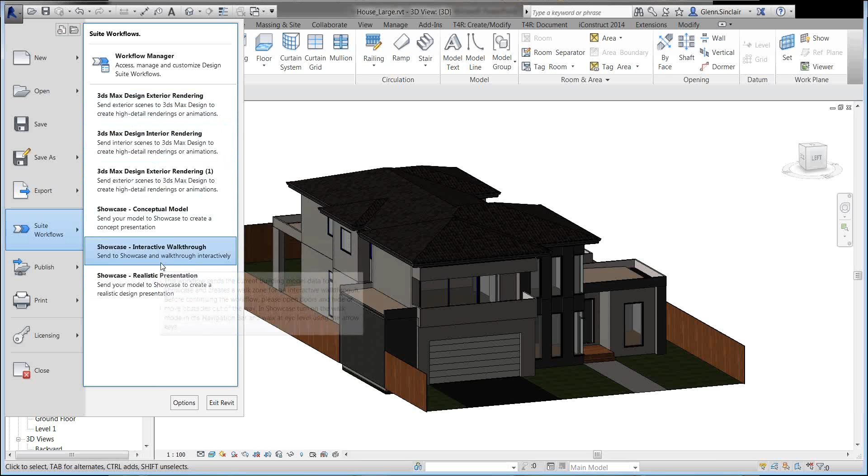So there's a few different settings that you can set up, these are the presets for different things. We're going to click that, we're going to send it to Showcase for an interactive walkthrough. I'm going to just leave the default settings there and let it go. I'm going to put my little environment down at below the floor level. And so that one click opens up Showcase in the background and transports the Revit model over into Showcase with all of its materials.

As you can see there, my computer's complaining a little, but that's now opening Showcase for me.

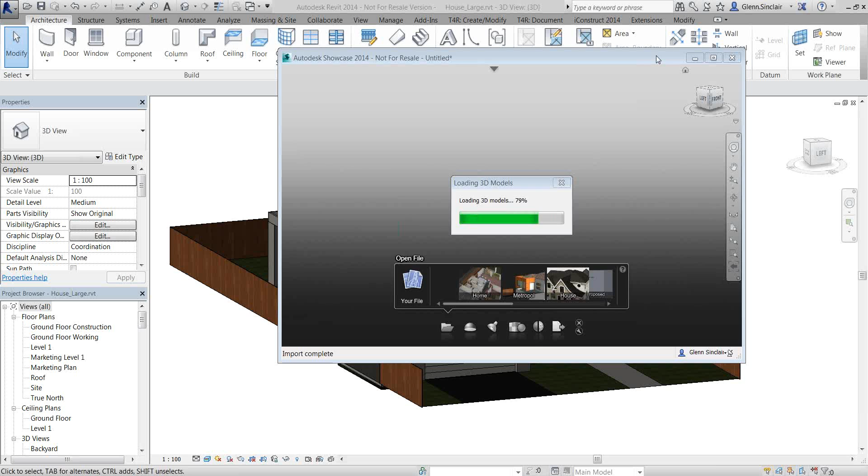Here we go. So Showcase is a tool that works with more of a real-time rendered environment. It's using the graphics card for rendering rather than the computer CPU, so you're getting a much faster render time, and we can do some real-time exploration of the model at a higher quality level than what's available in Revit. As you may know, once a Revit model does start to get large, it can be quite cumbersome to orbit around that Revit model. So this is going to solve some of those problems.

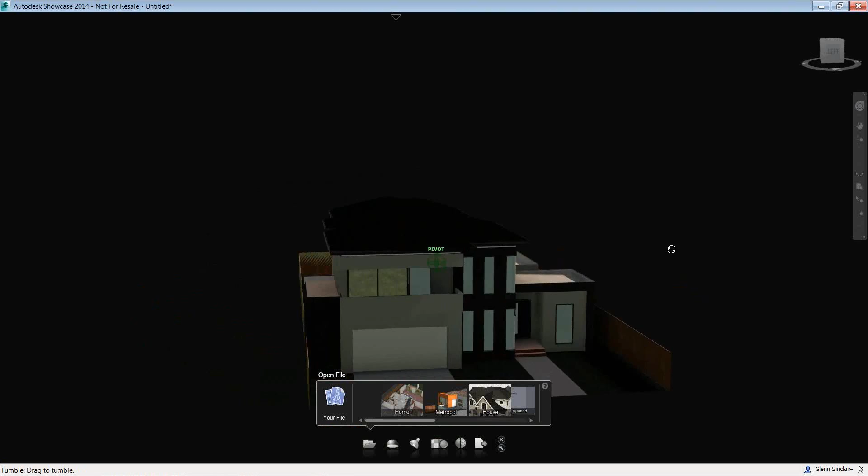So as you can see, it's brought my house through. In typical live demo fashion, the background has disappeared on me. I'm going to just try and put that back in. Usually I would be seeing this with a background of the grass field there, but it seems to be playing up.

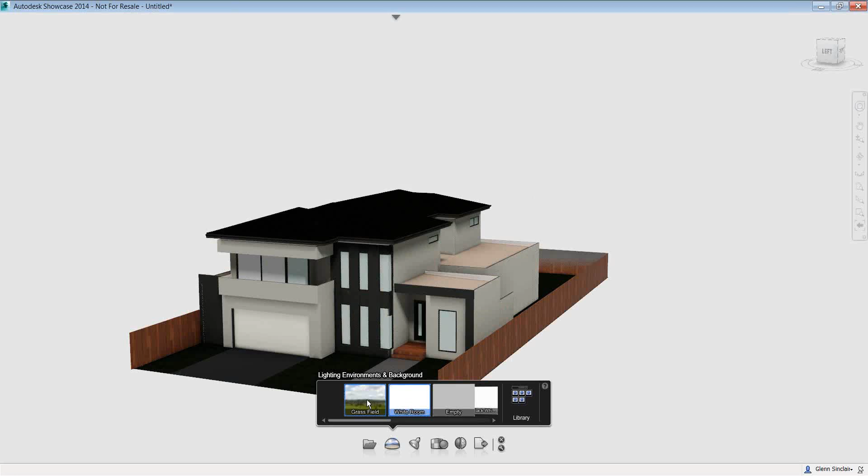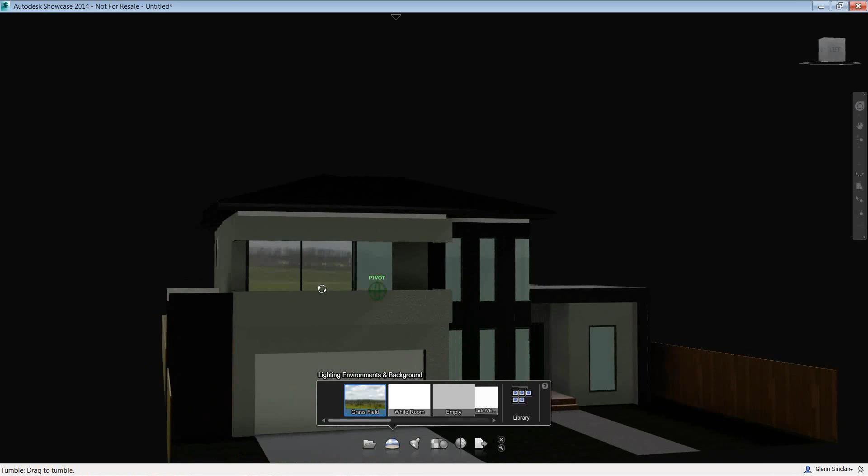That's a new one. Let's put it over to white, back to grass field. I would imagine that's something to do with the webinar recording. This usually looks quite nice with a dome background simulating the environment, but I'm not sure there's much I can do about fixing that. As you can see in the reflection of the window, that background should be displaying everywhere, but I haven't actually tested this whilst recording a webinar, so I'd imagine that's what we're experiencing.

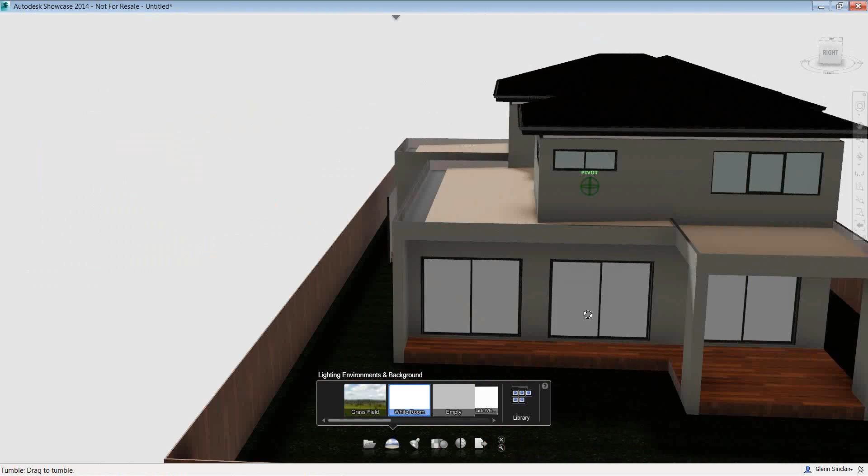So this was my one click, and it's brought it through with all of the materials here. I'm just going to put that back to white so you can sort of see what we're looking at, with the materials through from Revit and any custom materials.

Now I'm going to quickly open up one I prepared earlier, which is the same project that's been brought through from Revit with the Suite workflow, and I've just done a few modifications and a few things inside of Showcase.

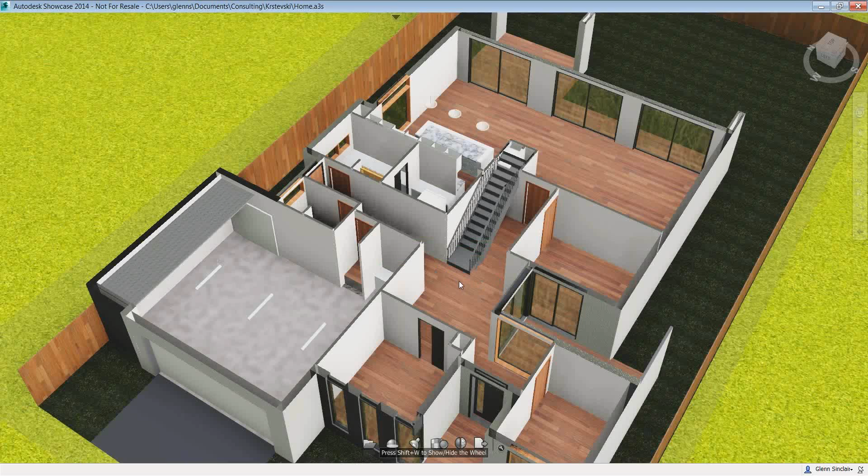So a couple of things we can use to present a 3D model inside of Showcase are options. Options work by having three different types. There are material options—if I come up here to the options tab. Sorry, what do I have to do? Alternatives, sorry.

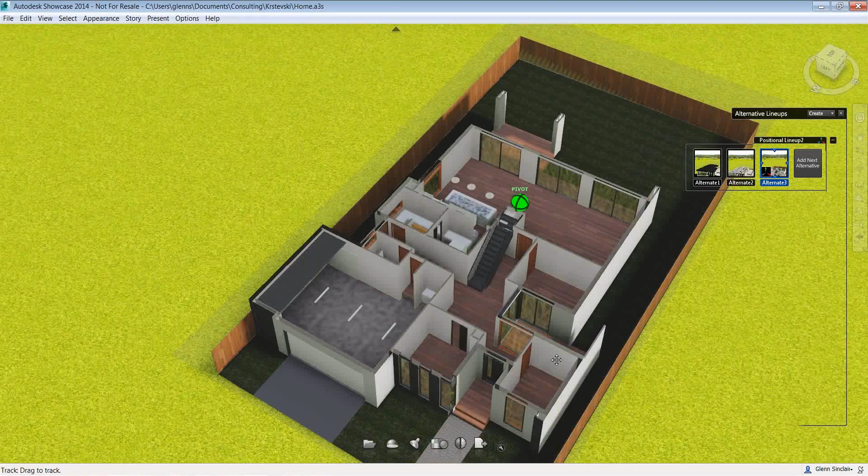So I've got here the alternatives. The first is a positional alternative. In this case, it's the position of the section line cutting through the building. Alternative 1 is to have that section line up top, alternative 2 is to have it halfway through the top floor, and alternative 3 is cutting through the ground floor.

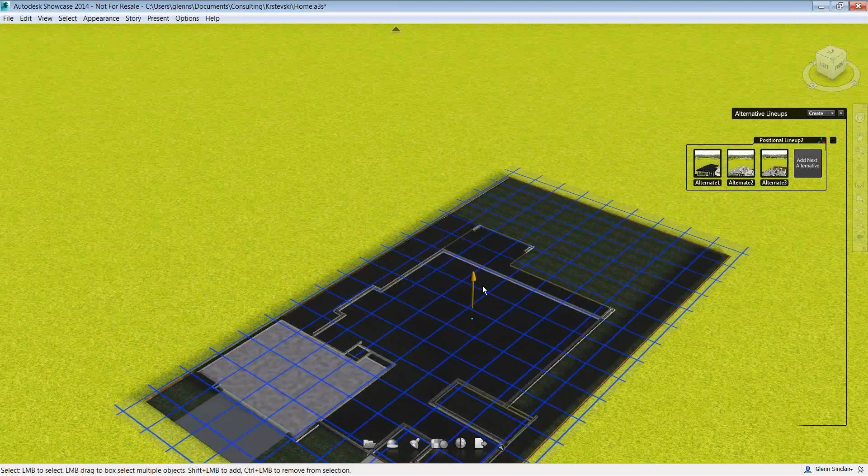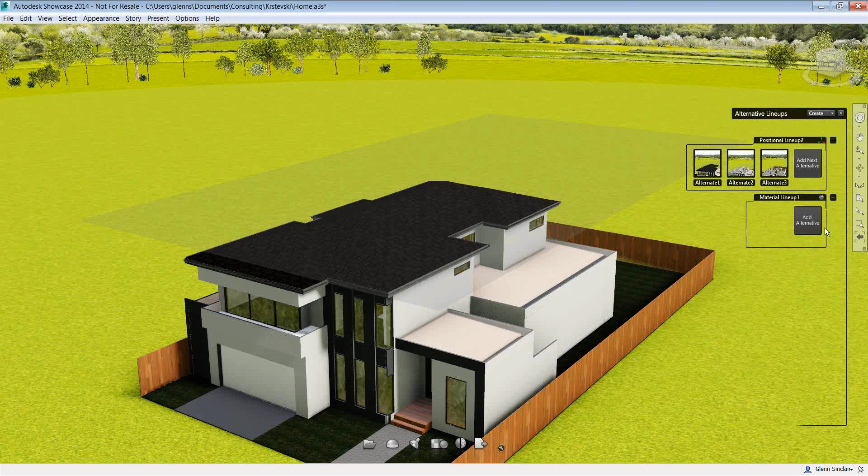So I can manually move that around at any time—do a bit of a Grand Designs thing going on, the house comes up—but I can preset the positions of that section marker here over in the alternatives. The other types are visibility alternatives, where things can be visible and non-visible, and lastly a material alternative.

A material alternative—I'll just show you quickly how easy it is to add one. It would be for a different color scheme on this house. So I may add an alternative: I select an object, and if I select all objects with that same material, I can be looking at the black stucco finish there. I can add that selection to an alternative.

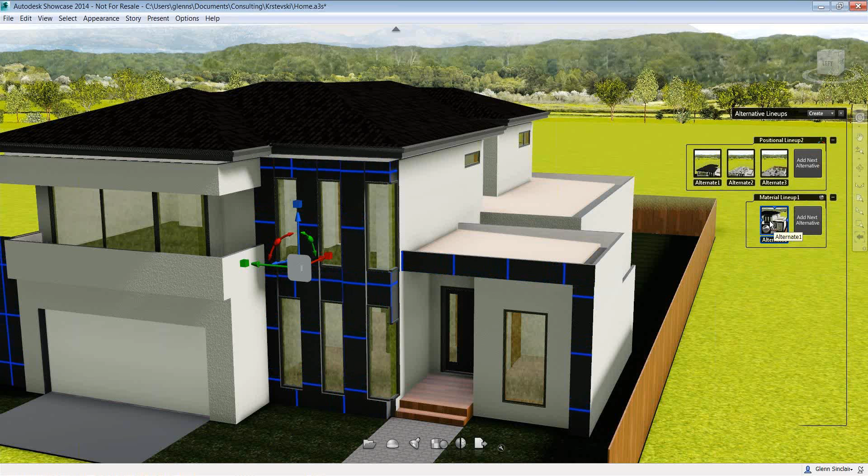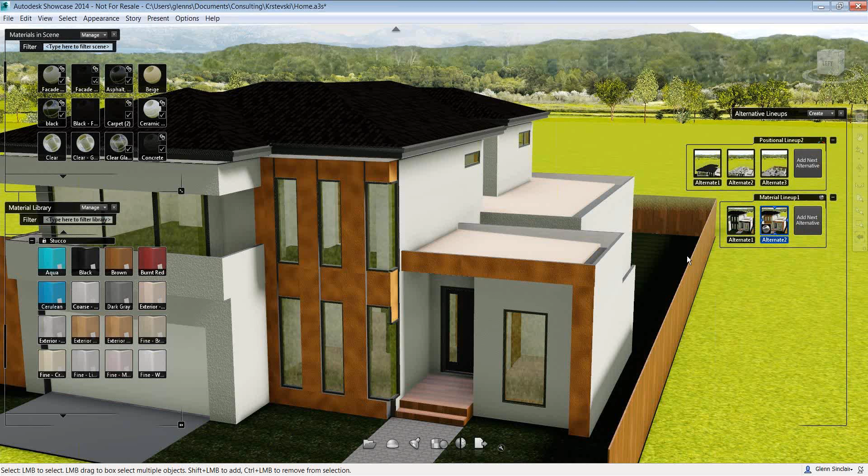Then I can easily change that material. I'll come up into materials—it's got a bunch of built-in materials here. I'm going to go to the Autodesk ones and get a different finish, so we're going to go with a brown color there, and say add next alternative. So just like that, I've got an alternative I can present to a client, where alternative 1 is the black finish and alternative 2 is the brown, and I can go around changing materials and positions on a number of objects, but that's just the basic aspect there.

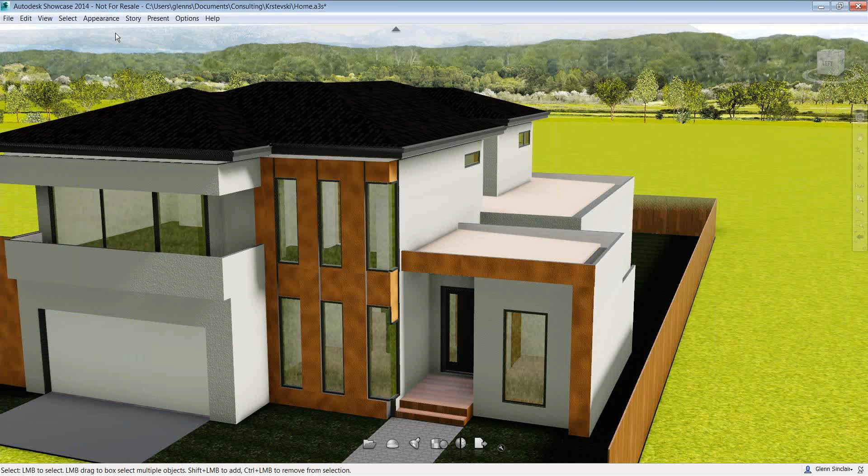So those alternatives can be displayed in what's called a storyboard. What you would generally do is go around and take a number of camera shots—so I've moved the camera into different positions and saved those as shots. Shot 1 being the beginning, click shot 2, I've set it to transition from shot 1 to shot 2, sort of like SketchUp in the way it's presented there.

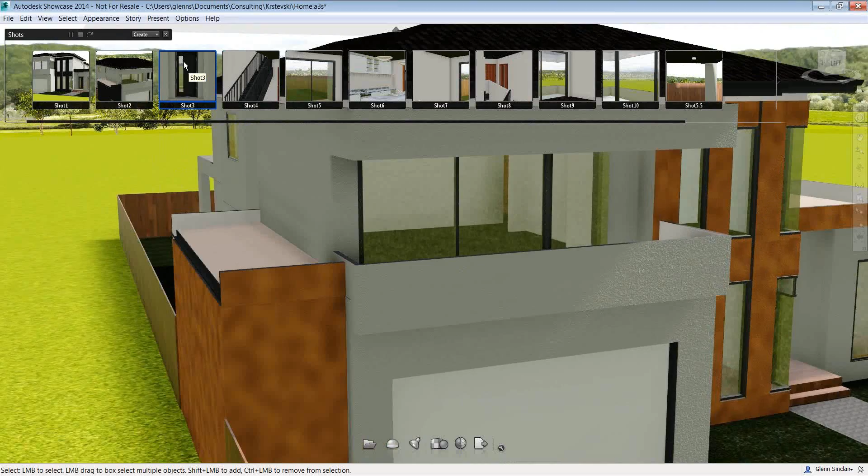So those shots can be added to a storyboard. If I come up here to storyboard, this is a number of shots that have had the alternatives set on them—so we could have it zooming to the camera and changing the material to whatever it is. If I hit play, it's going to show the certain shot for a number of seconds and then move to the next.

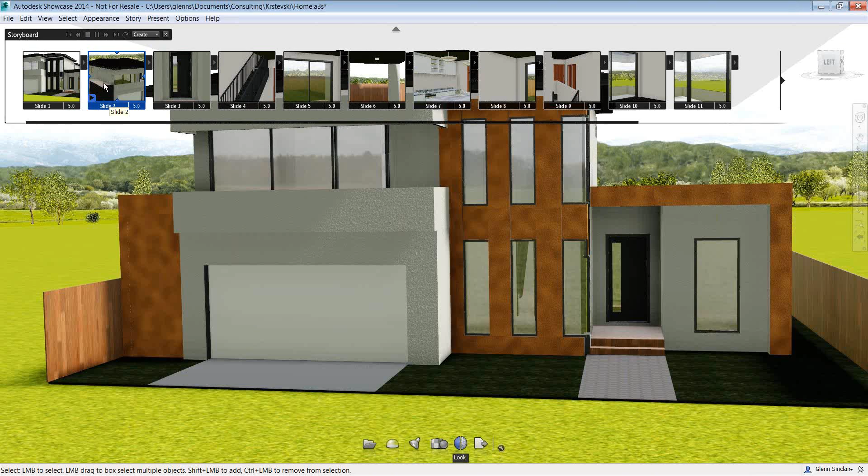And then the last two shots simply have the alternative of the section box added to them—so a camera shot with the material alternative and the section box in there.

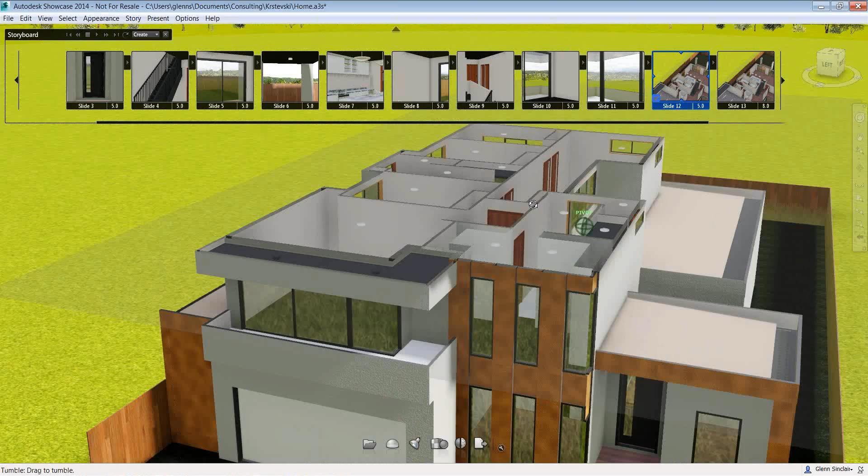Stop that. So this is all very nice to show if you have the client in the office sitting in front of you at your computer that has Showcase installed. But another great thing about the tool is that it can be exported out of Showcase in a number of formats—so I can save this storyboard set as an AVI, exporting it out as a movie file.

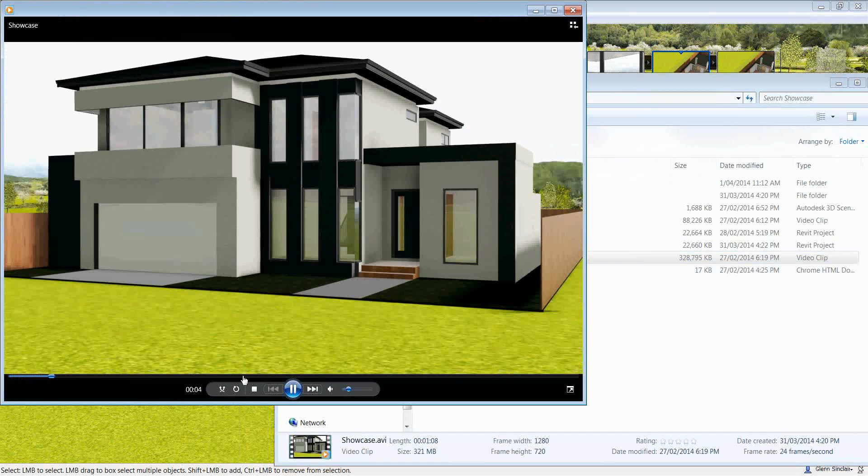So you see that comes in at about 330 megabytes, and then you send this off to the client. They don't have to have Showcase installed, they don't have to have any special software - they can just sit there and watch the movie.

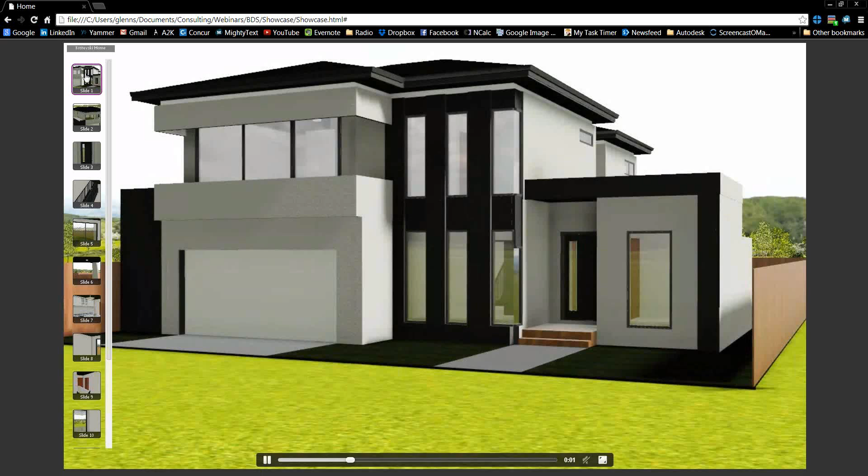The other format you can export out of Showcase is an HTML file. That creates a website you could email to the client, giving them the option to click on each slide. As they click, it transitions from one slide to the other, so there's a bit more control there. If I just click straight through into my kitchen area, you can see - all right, very nice - upstairs.

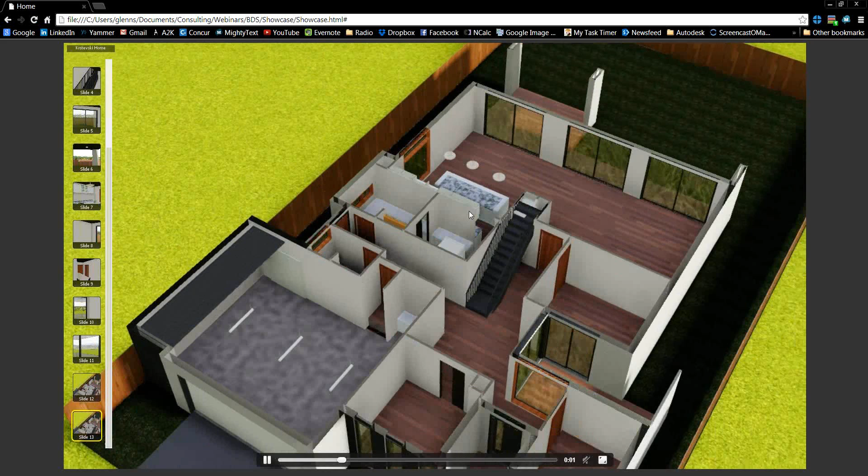And we chop the roof off. So a good little example there of being able to export out of Showcase and give it to clients who aren't running the software.

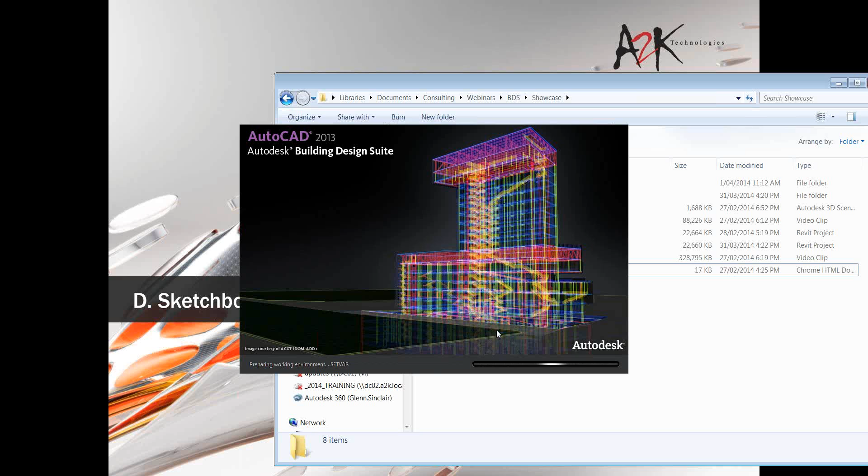If we're using AutoCAD at the moment for design, it can be a little frustrating sometimes not having the flexibility for free-form shapes and whatnot. Let's put this over here. So with the Building Design Suite, Sketchbook Designer comes as a tab inside of AutoCAD - you can access all of the tools here.

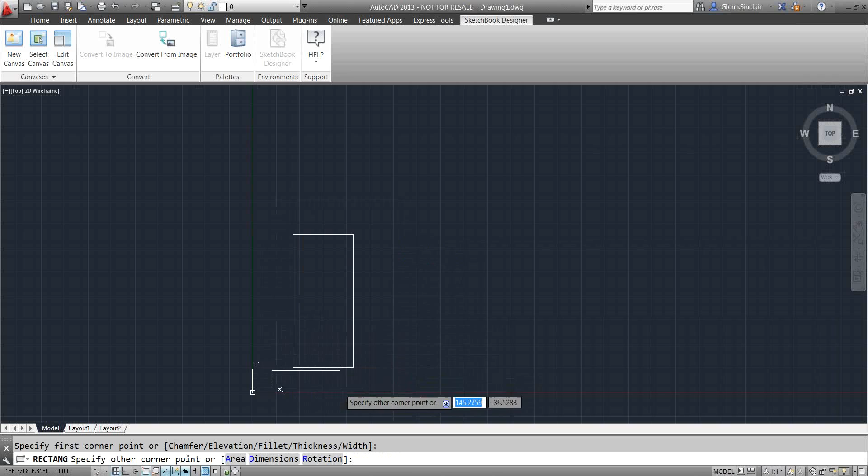So I'm going to ever so crudely model up the beginning of my project, which looks a little something like this. This is an elevation of my office tower, of course.

So the way we need to get started, if we wanted to add a freeform canopy here, is the example I'm going to use. It would be possible to go ahead and try drawing a spline to the shape, but Sketchbook Designer is really the tool to get a more sketchy format where we can start drawing - it works with canvases.

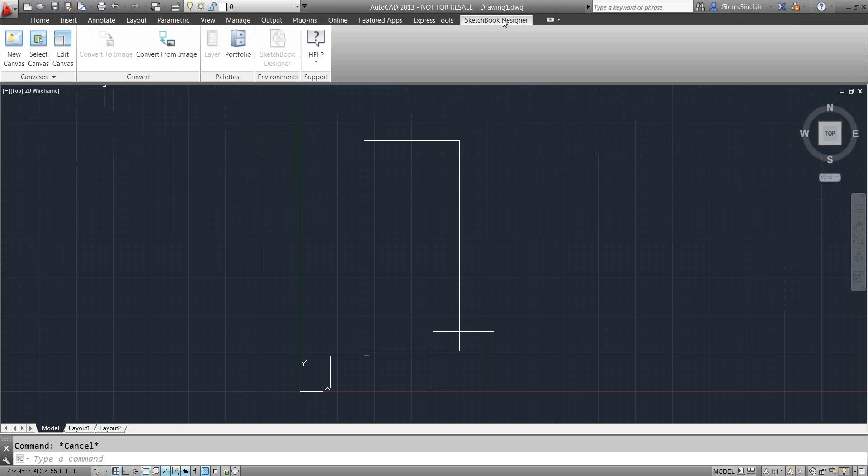So when we look at the Sketchbook Designer tool, we can see we have to create a new canvas, which sets up the size of the paper that's going to open up inside of Sketchbook Designer. Oh, thank you, I haven't activated it - try that. So it's going to come up with the canvas size and let me know what size I'm looking at here, pixels per inch and whatnot.

The width - let's give it a better size that covers my design here. Whoops, that wasn't very good.

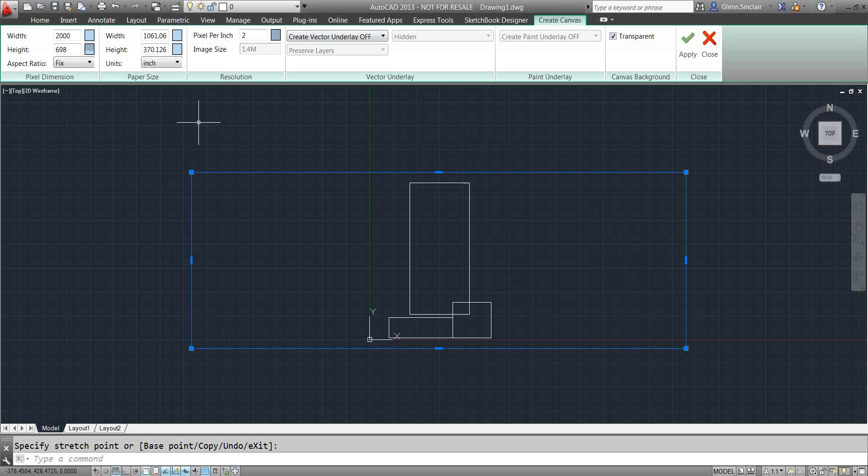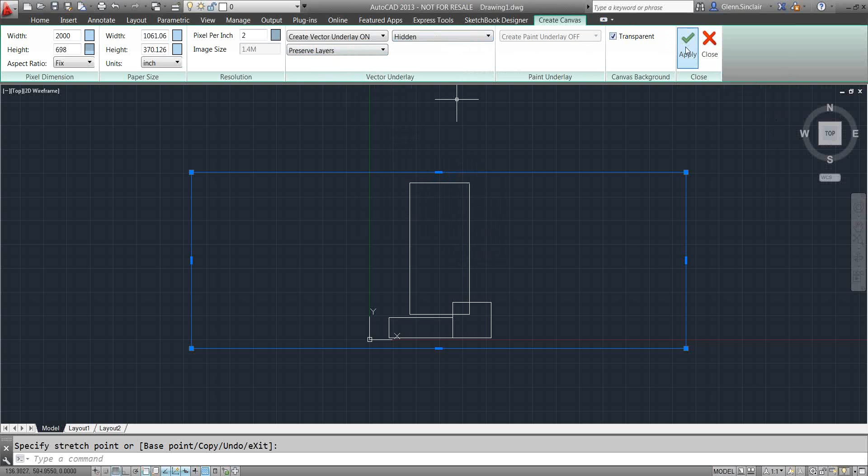So when we create that canvas, you have the option whether the vector lines from AutoCAD come through into the canvas or not. I'm going to say yes - create vector on, which will bring these DWG lines through from AutoCAD into Sketchbook Designer, and I'll let those preserve on the layers they were on if you had a full elevation with layers set up. Then I'll hit apply to create the canvas initially.

So that has turned that into a canvas. Now I have a few tools within AutoCAD, but the bit I'm going to demonstrate here is to actually export out to Sketchbook Designer. So when I click that button, it's going to minimize AutoCAD, and it's AutoCAD in the background.

Looks like it's crashed - it's not responding, it's got this spinning hoop of death, but it is still there. This is normal, it's just that you have frozen out the AutoCAD session to work in Sketchbook Designer instead. The moment we bring this back into AutoCAD, it does become active - you have to trust me.

So here I am in Sketchbook Designer. This is more of a freeform sketching tool. I'm here working with a mouse, which isn't very nice, but if we had a touch interface or a pen setup, we would be looking at something a bit smoother.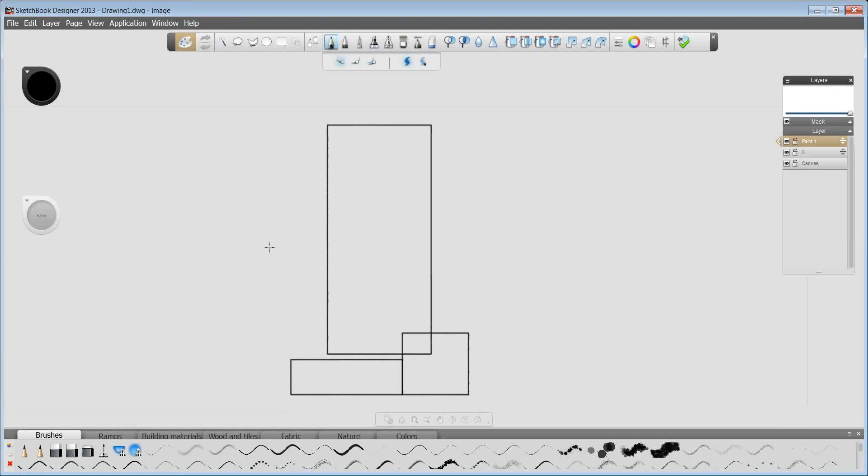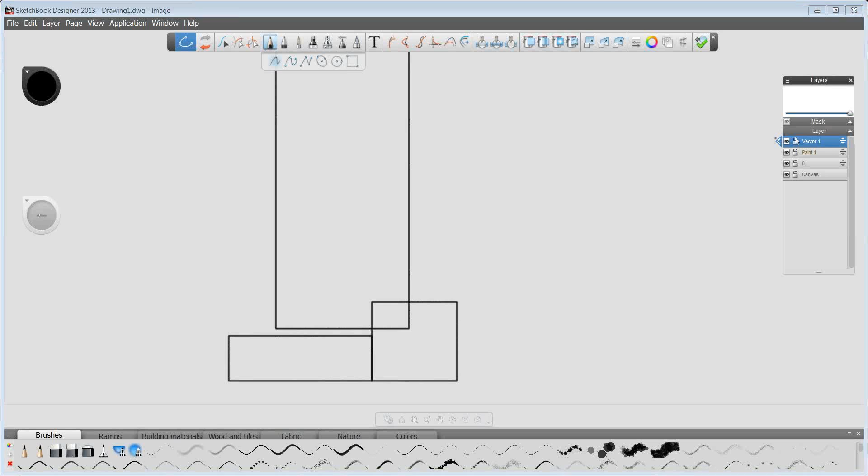In Sketchbook Designer, I can go ahead and start creating my sketching over the top. I will begin by creating a new layer. We've got a couple of main options here: a paint layer and a vector layer. A vector layer is for vectorized lines, so I'm going to bring these lines back into AutoCAD and work with those there. A paint layer creates a raster layer, so that doesn't have the vector information included in the lines.

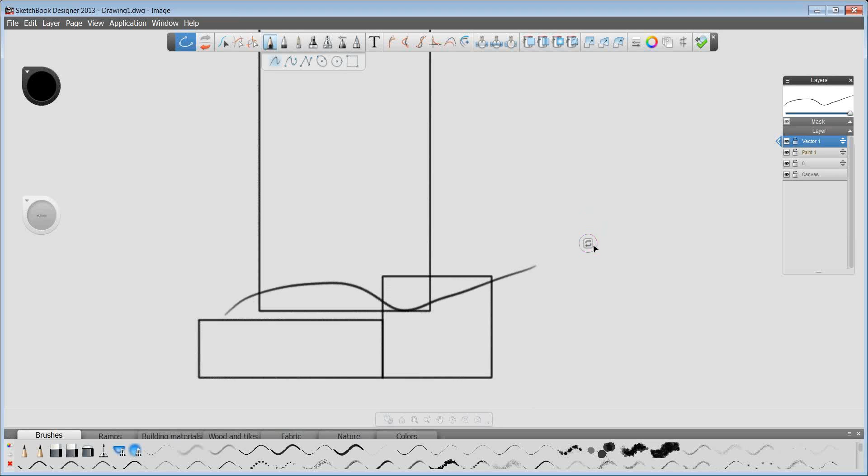So I'm going to begin by sketching. I can do a curve through point, but I'm just going to start by sketching in my beautiful canopy there. With Sketchbook Designer, my line looks a bit rough as I've done it with the mouse, not exactly smooth. After drawing that line, I can come through to the little circle around the tool and adjust the smoothness. If I bring it right out to the outside, it's almost straight. If I bring it right down to how it was, it's almost exactly what I drew. I want somewhere in the middle to create a nice smooth curve, so I'll have that sitting somewhere around there.

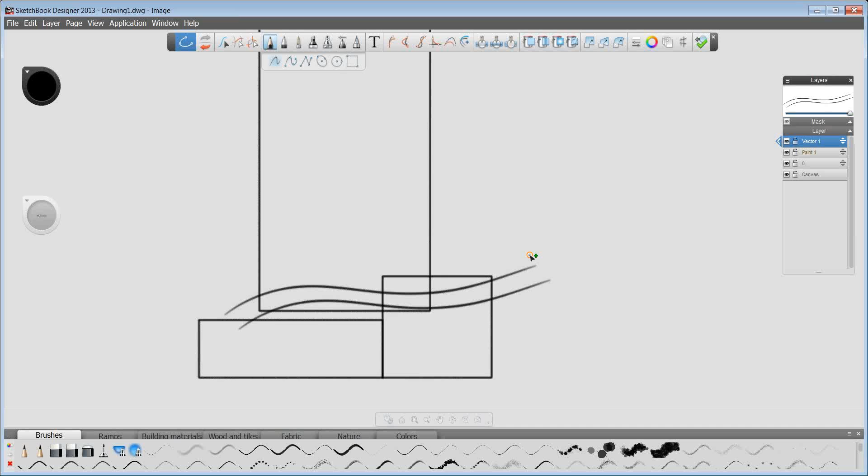So a few common tools in there. I can select these lines and copy, move them around and things like that, all pretty standard tools. I'll go ahead and draw a few extra lines here to finish off my canopy. There's a handy little tool here to select the outside edges only of my curve, so all the bits I don't want, the little end pieces, I can delete those in one go. Yep, that's going to be fine for my canopy.

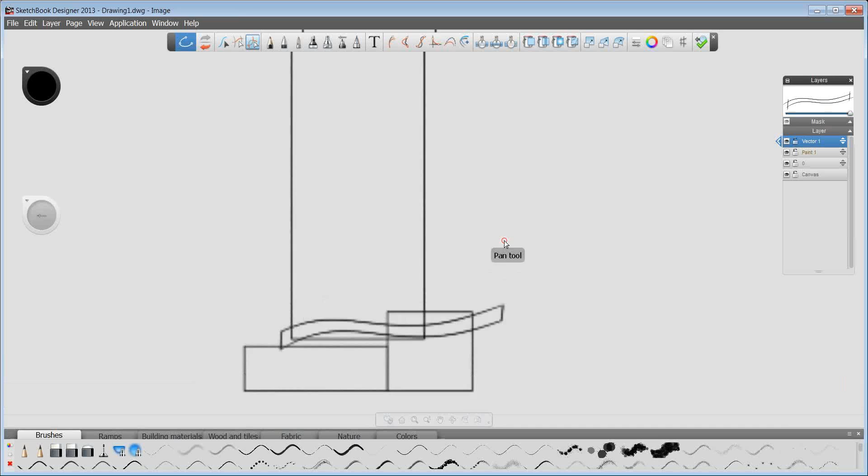So I can then, if I wanted to, create a paint layer also. Hold down left click, I can create a paint layer and embellish this with some trees or what have you, to show the idea of bringing in something in a paint layer and something in a vector layer.

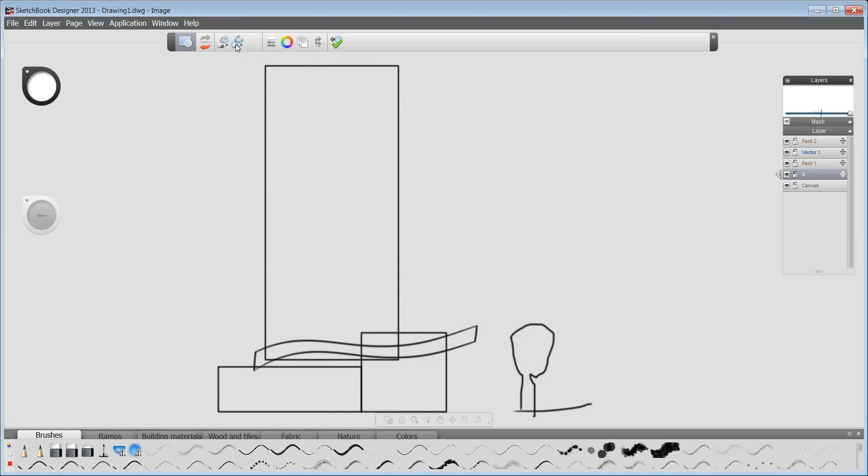The last thing I can do is with my AutoCAD objects here, I can convert so layer 0, which was what came through from AutoCAD, I can convert to a vector layer, and then work with those objects. These are my DWG lines, and I can then change the style of those lines.

So if I wanted something sketchy, well that's an extreme example. Let's say a more sketchy line, or something like a painted line, and I can change the brush radius and whatnot down, somewhere around there.

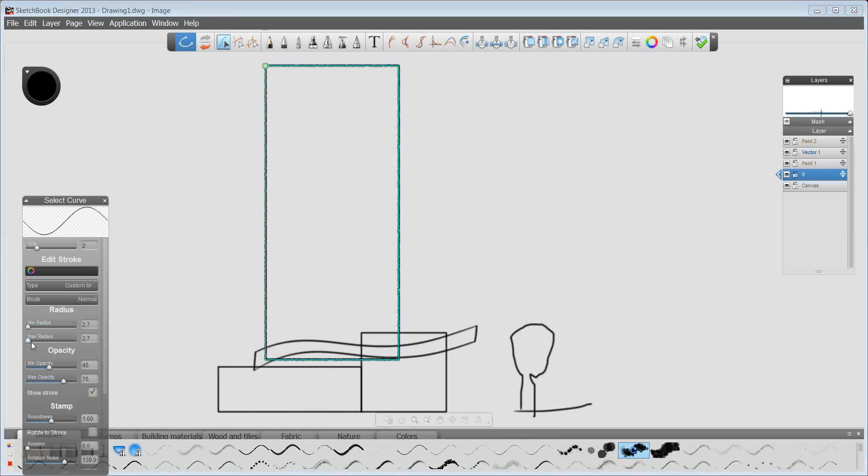So I can change the line styles here that are going to affect the objects back in my AutoCAD session. Okay, so we've got our vector layer, we've got a couple of paint layers, and we've got the other layer there. So now, to bring this information to a DWG format, I can use the export option here and say a DWG. That's going to create an AutoCAD DWG with this information saved into layout space. That can be handy if that's the workflow you're going through.

But for this particular one, I'm going to just hit the button out to the right here, return to AutoCAD. And we do need to click save. If you click discard, it's not going to save any of your changes. I click save here, and we see now that we have this information back inside of AutoCAD.

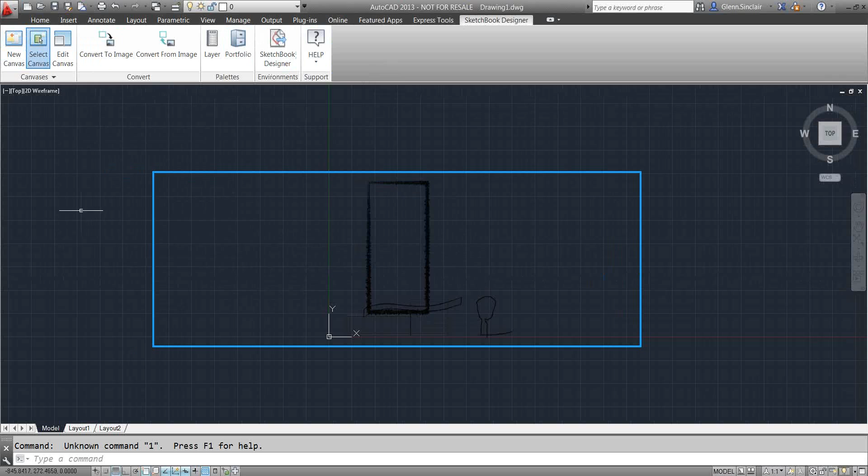That's not real clear there, if I just change my background, and then select canvas. Well, that's a good tip. So when you're working with these canvases, you can't perform any other commands until you've unselected the canvas. So here we go, unselect. That's more like it. So I wanted to change my background color there.

You can see what I'm dealing with. Okay, so I've modified that layer there.

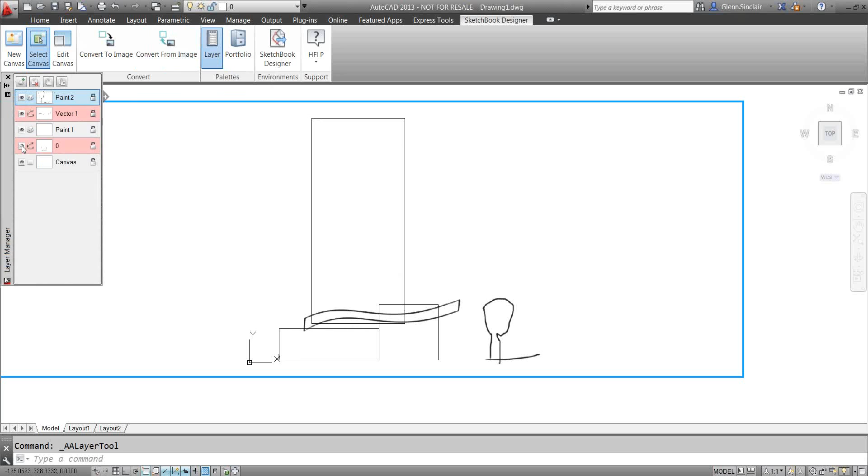So in the Sketchbook Designer area, I can select the canvas. I only have one in my file at this stage. I can see the layers that we had there from Sketchbook Designer, so I can do things like hide the original DWG layer there, the one coming from Sketchbook Designer. You can see the vector layer there and the paint layer also.

So this is, at the moment, suitable for printing. If I needed to print this exactly with my raster objects and my line styles, I could just jump into Layout Space and do a print of this information.

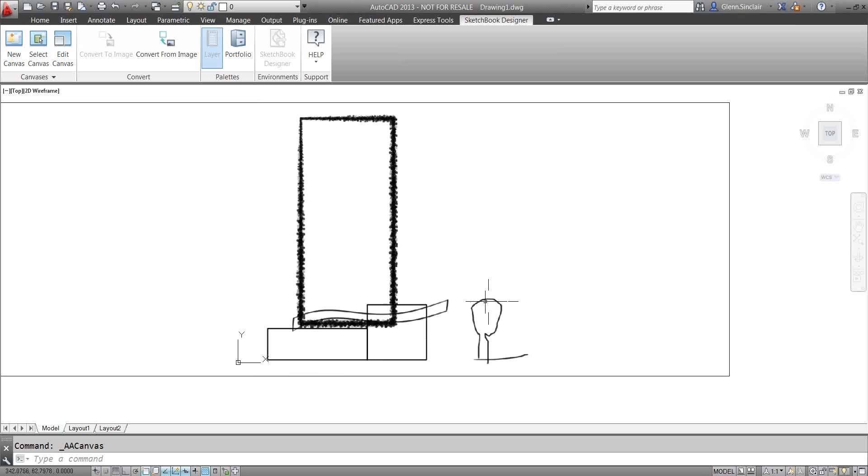If I need to work with it further, if I've got this curve exactly right and I want that to be traced over, we can actually convert that information into DWG lines. So if I select the canvas again on my vector layer, I'll right-click and say replicate vector into an active AutoCAD layer. At the moment I've just got layer 0 active, so I click that, and I get those objects inside of AutoCAD.

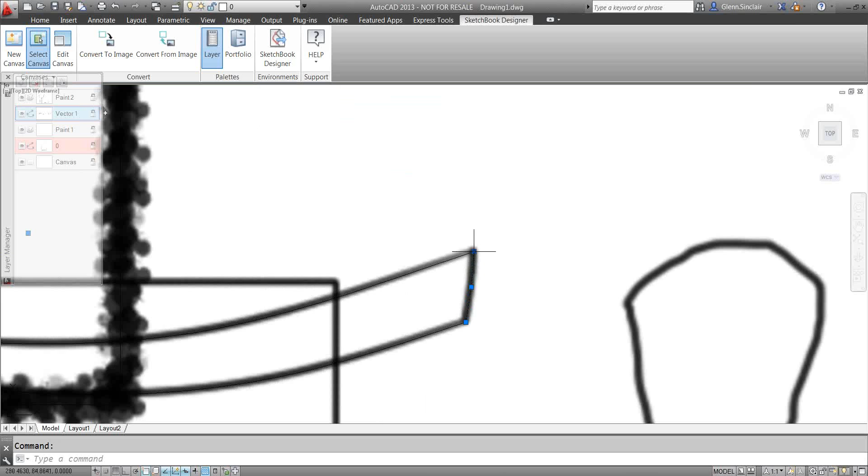So if I just go ahead and hide this canvas, I can see now that my DWG actually contains the lines that I've created inside of Sketchbook. So that can be quite handy. I've still got control over those. It's created them into splines by point, and of course we have the options there.

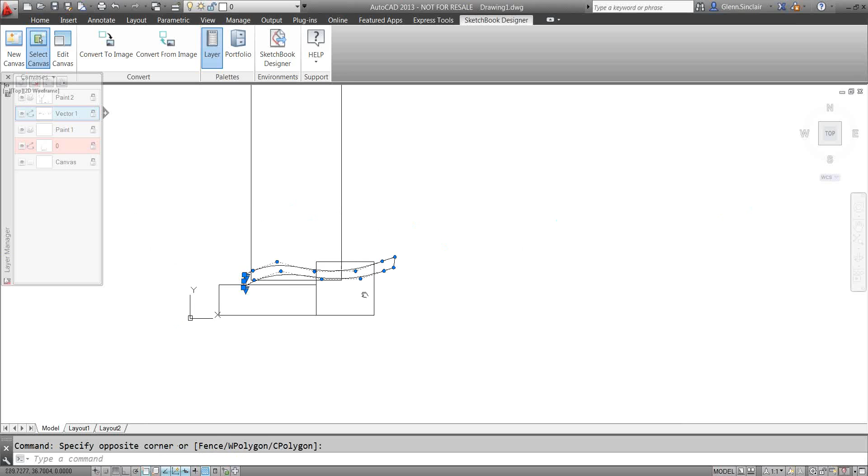So if we've got an exact shape that needs to be done by hand, we can use Sketchbook Designer to do that. Still got my canvas selected, of course. We need to unselect that before we do anything, and we can get those tidied up.

So yeah, we've created a freeform curve in Sketchbook Designer, brought it back through and vectorized it, changed it into a layer inside of AutoCAD.

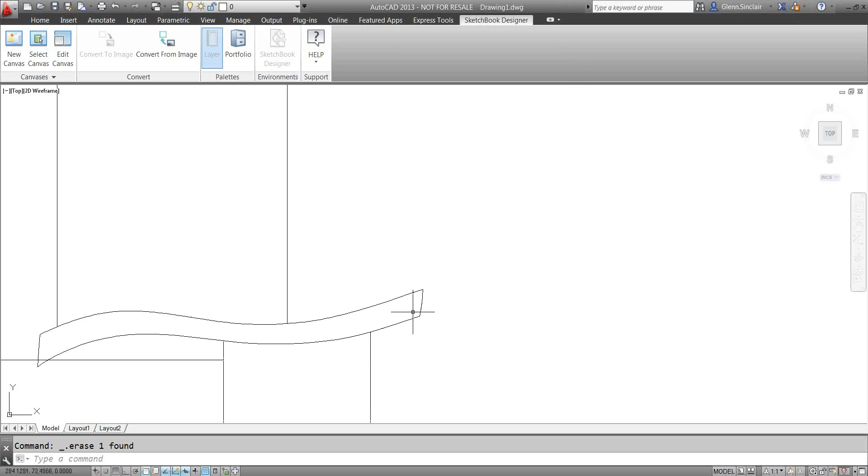Alright, so the next of the little tools that we're going to go through is AutoCAD Raster Design. This is included again in all suites - Standard, Premium and Ultimate - and again appears as a toolbar inside of AutoCAD. So I'm going to whip up my 2014 version, which has that one installed.

AutoCAD Raster Design is software to convert raster to vectors. Raster images are JPEG formatted images and whatnot, where it's a number of pixels side by side. It doesn't contain the information about the line that created those pixels, whereas a vector image contains the start and end point of a line - it's more of a smart line. So the lines that we're dealing with in AutoCAD are vector lines.

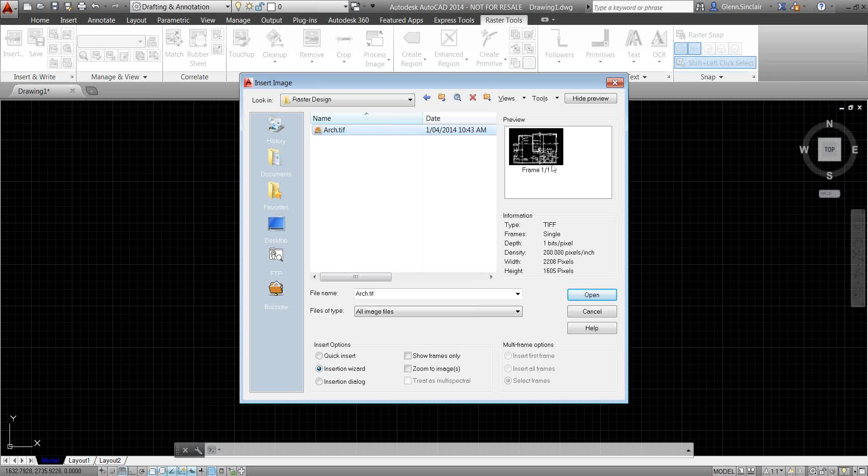I do have one of the example TIFF files that comes with the program, so I'll just show you that in action now. When we use the insert tool, it gives us a number of options. I'm not too worried about the size at this stage. Zoom all - there we see our raster image brought in the background.

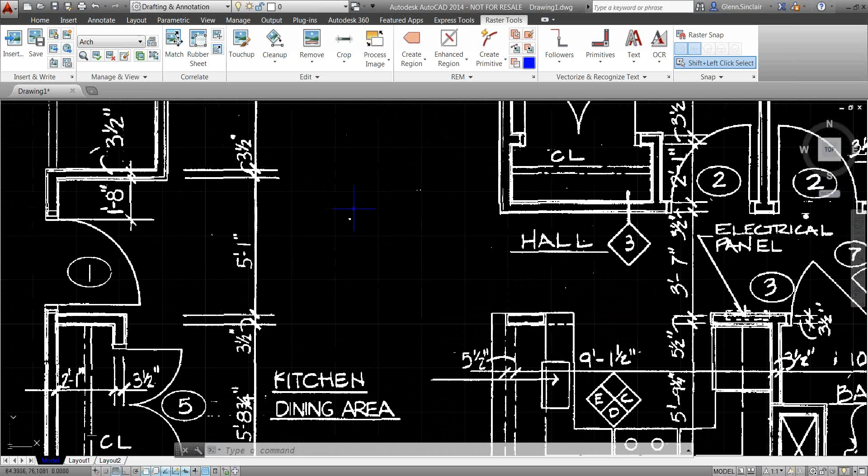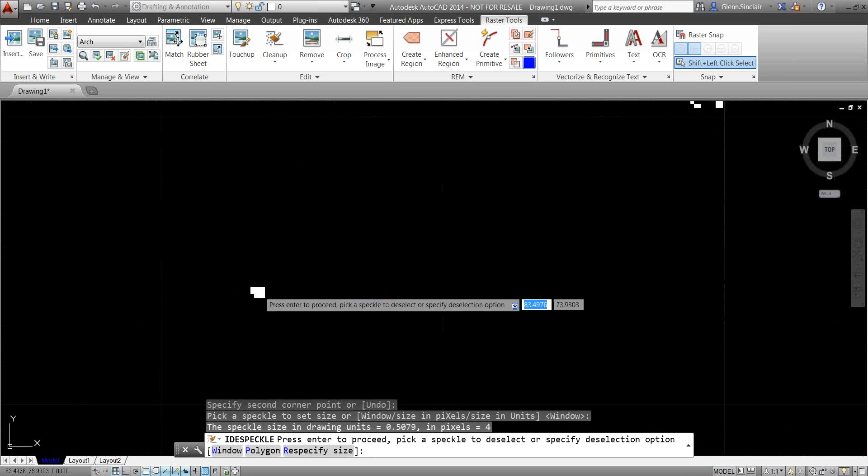So as I mentioned, a few of the tools are the cleanup tool, so the despeckle to get rid of those little dots and bits and pieces that have come into our scan. So if I use that first up, I can say cleanup and despeckle. It's going to ask me which image, so I'm going to say all of that is the area to be despeckled, and then it's going to say pick a speckle to set size. So I could type in the size of the speckle I want to get rid of. I'm going to click that and hit enter, and it's tried its best to get rid of the speckly bits based on the size of the speckle I clicked.

So it does an okay job. A few other little tools up here, like masking regions, so we can remove a section of the JPEG scan. I can say a rectangular area to remove, and remove this little guy here, so take that out of the JPEG scan. That's kind of nice.

The great bits are, I guess, converting from raster to DWG lines. We can do that with a follower. I'm going to do it here with raster objects, and say create primitive, and it's on smart pick there. So if we've got options like lines, arcs, circles, I'm going to use the smart one, so it should pick up - if I click a line, it's going to convert it into an AutoCAD line.

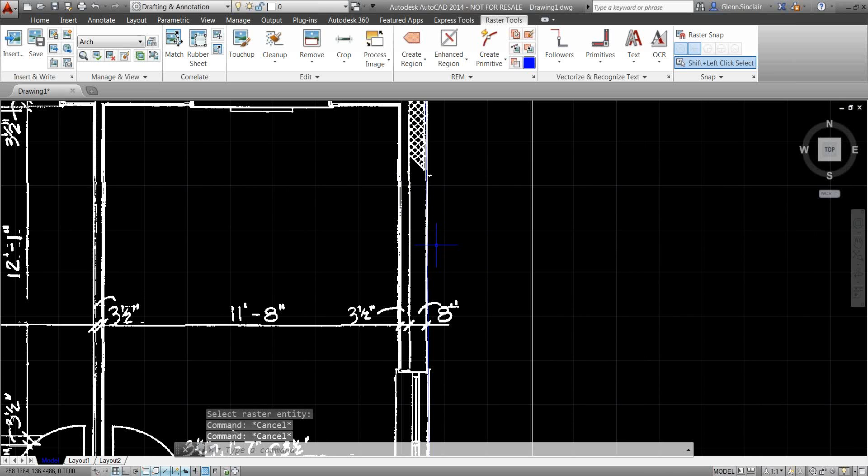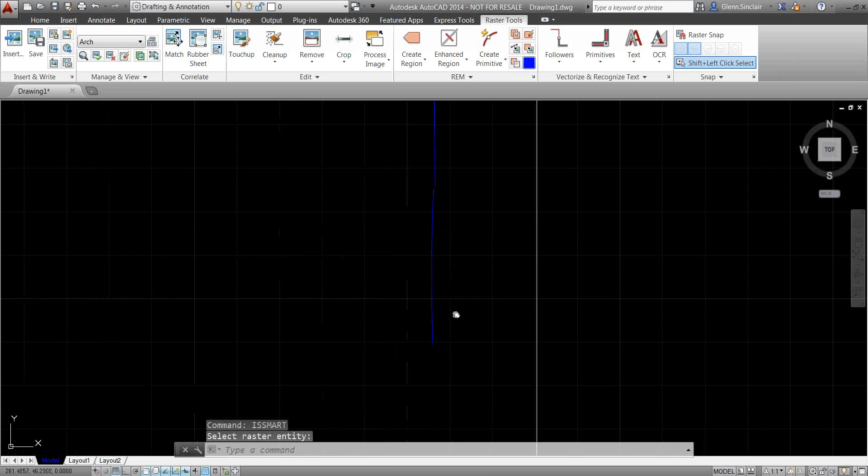Fingers crossed, I'm going to click this line. Oh, there we go, didn't do too badly. It's created an AutoCAD line underneath that. I'm not sure if you can really see that, but I do have endpoints on that line. It's colored the raster information in the background that it used for the pick of the line. If I move that out, you can see the line is now associated to that raster info. And then if I repeat the command, I can go around and continue to turn my raster image into a vectorized format.

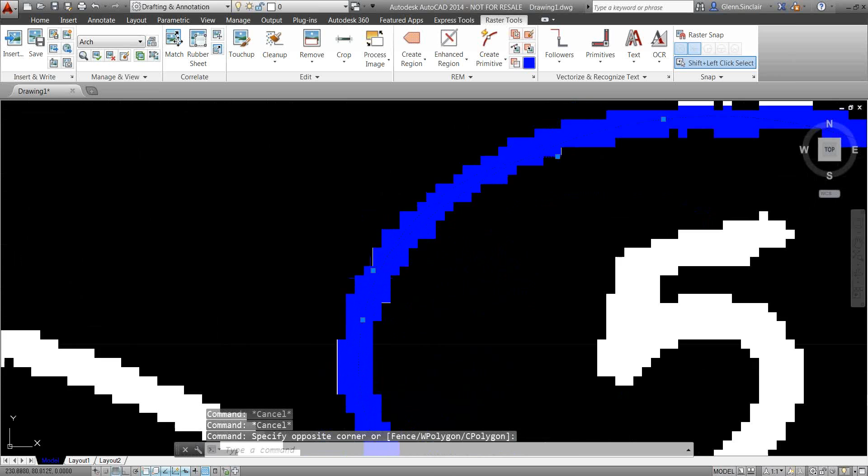So I've got actual DWG lines there in the background. I'm not sure what it's going to do for this shape - okay, it's used an arc on there. So it's trying with the objects there. The circles, no, okay, it hasn't lined those up very nicely at all, maybe not so good on circles. So with the lines, it does a pretty okay job. We could then work with those lines and tidy them up maybe a little and change the layer and the thickness and whatnot.

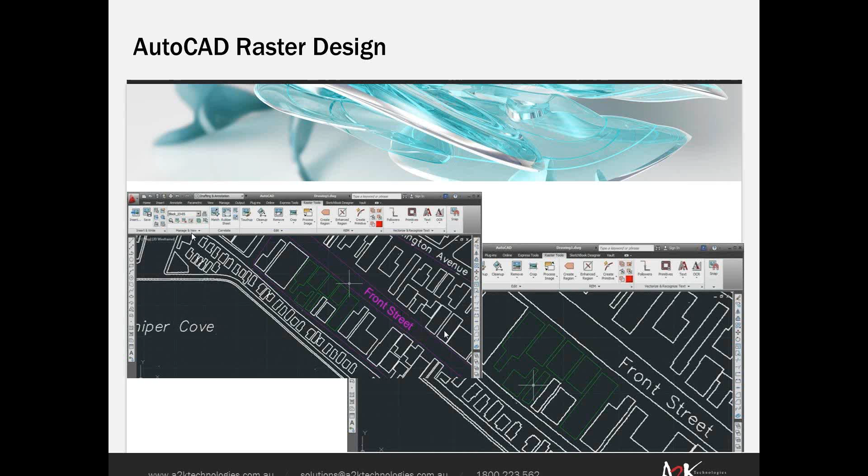The text tool is not quite so nice. I think the example used in the demo is a file that's been done on the computer, printed, scanned, and then come out, so with font that's come from a computer it maybe does a pretty okay job. But this file I've got in the background has handwritten text, so it has a bit of trouble recognizing what the text should say.

So I can do that with the text tool - if I do it with this text recognition, select what the text object is, select the first point, the angle is 0, the second point. Okay, so that is the piece of text I want to convert. It's picked up that as the image, and it's almost got it - it's put in N there instead of my H. So we can touch that up. I can type in the H manually and get rid of those extra spaces in there. Yes, okay, thank you, and then hit OK.

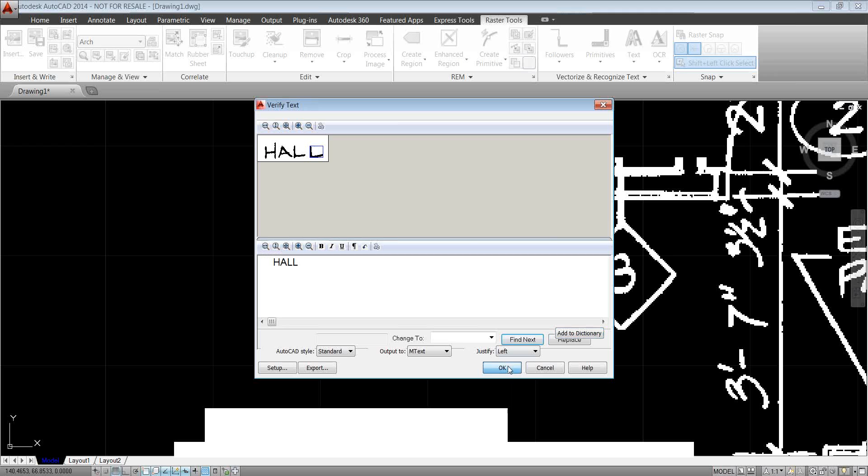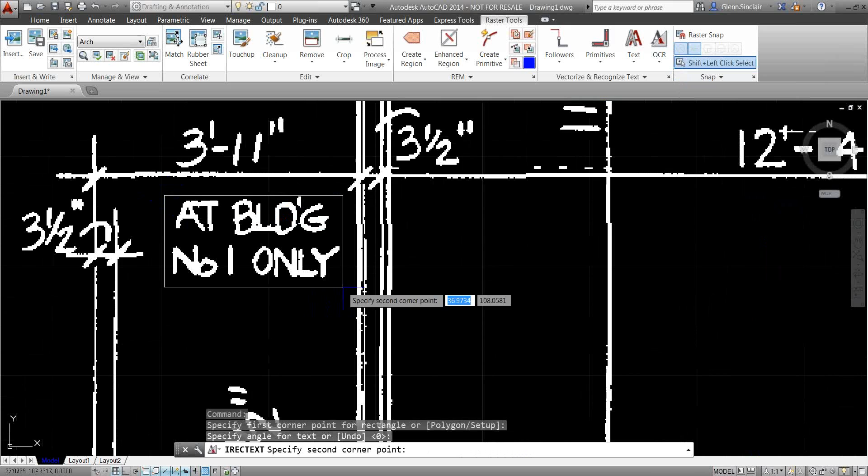The style - I don't really have any styles set up, so it's just set onto whatever the default AutoCAD style is. We can set that to remove the text off the raster and then create the DWG text instead. If you had your styles set up with the same size and whatnot, conceivably it could be as easy as just going around each of these pieces of text and putting a box and clicking OK. And it hasn't done a very nice job of that one at all, so I'm going to go for it anyway.

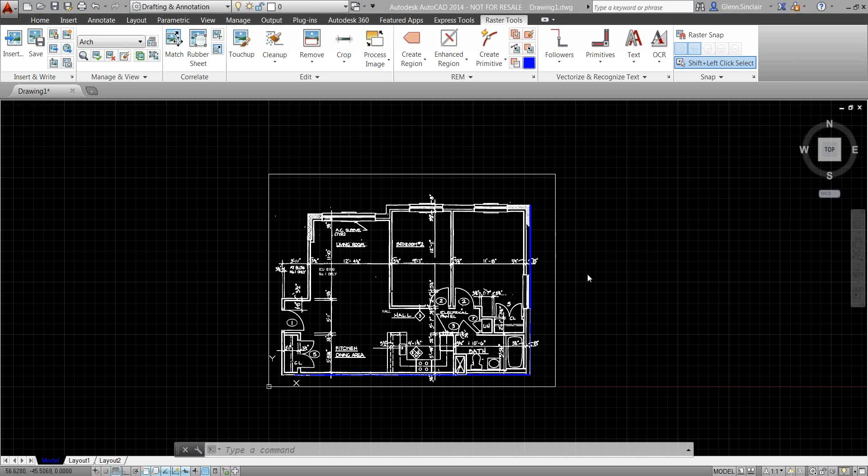Okay, so the next little tool that you may not be using is called Recap. Autodesk Recap is a reasonably new tool, and it stands for Reality Capture. It comes in all of the suites - standard, premium, and ultimate.

So Recap is a software that can be used to work with point clouds. Point clouds are a 3D laser scanned file, and it works by setting up the scanner in the middle of the room. The scanner will detect the distance in each direction, taking millions and millions of points in space, giving you their XYZ location and also the color.

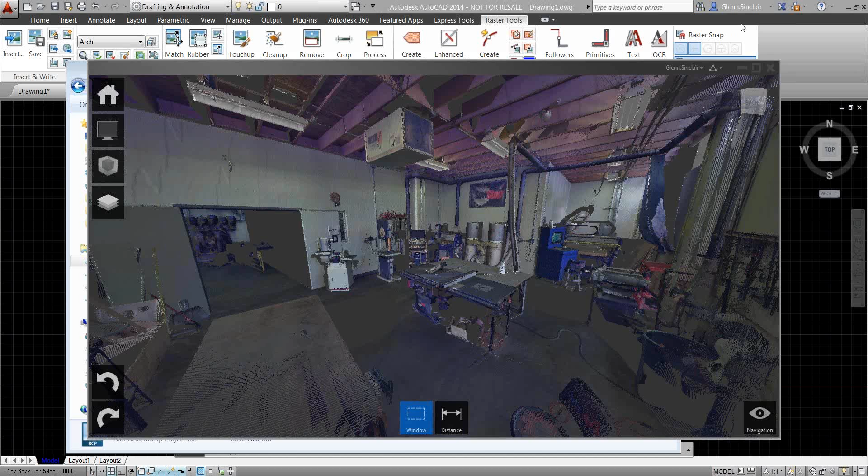Recap can be used to view these point cloud files. I've just double clicked on a point cloud file here. If I use the navigation, we can look around - it's pretty familiar from AutoCAD. See, it might start to go a little fuzzy, and as I stop orbiting there, it's going to resolve the image somewhat. I can use the fly tool to go around and navigate this space.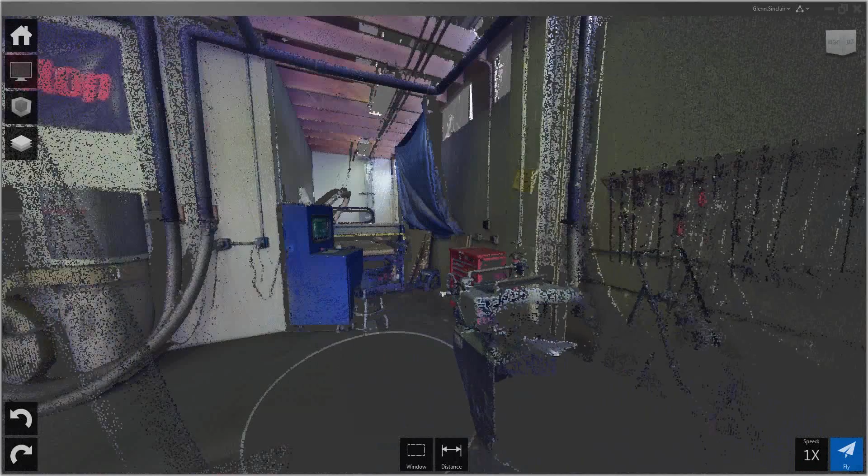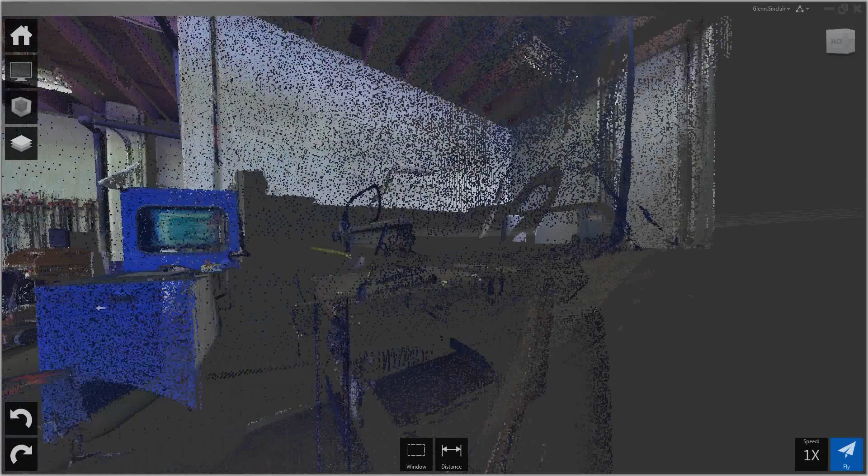As I mentioned, a point cloud is a number of dots. So as I get closer to objects, they start to look like they're fading away - those are the dots. When you're zoomed out, quite far from an object, the dots appear to be a solid wall, but as we get closer and closer, you can see each of the individual dots as I zoom past those objects.

Point clouds are really great for working within an existing space, the context of an existing building, or in this case the workshop. The Recap software can be used to convert what's called the raw point cloud data. All of the different laser scanners have different formats that they export this point cloud data into. The Recap Studio software can be used to aggregate all of those different models in different formats, and we can convert them into what's called an RCS format, which is what Revit can take.

So we can import these point clouds into Revit by first converting them through this Recap software. It imports from many different point cloud formats.

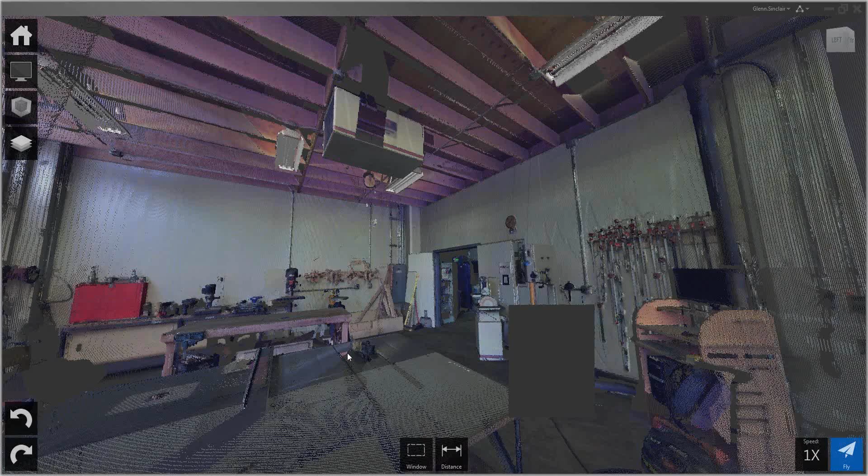We can also use this software to edit the point cloud. So I can select a number of points here, all of the points that I can see there, and edit this point cloud file. I can delete those points so that they are all gone - that's just a bit of a random deletion from my current selection. As you can see, it's gotten rid of the lower half of my drill and whatnot.

I can go ahead and get those point clouds and put them on different layers. So I can create what's called a region here in Recap - I can say that I have a single point cloud with two different regions, one showing the existing area and one discarding that existing area. So that's a good one.

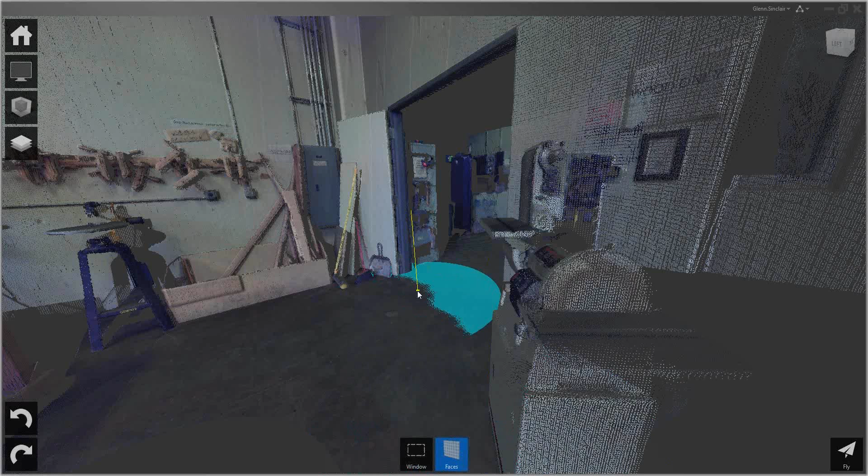It also has the basic measuring tools inside of Recap. So I've got this point cloud file, and I can measure from the face - it's going to do its best to pick up the faces of all of the objects and whatnot, doing its best there to measure that doorway. So it can be used to sort of interrogate that point cloud model.

If you haven't received a point cloud model before, they're becoming more common. Have a look at the next company you use to do the existing conditions survey, and if they're able to provide that point cloud, that can be a really good base because no information is left out here - we can see everything in the point cloud.

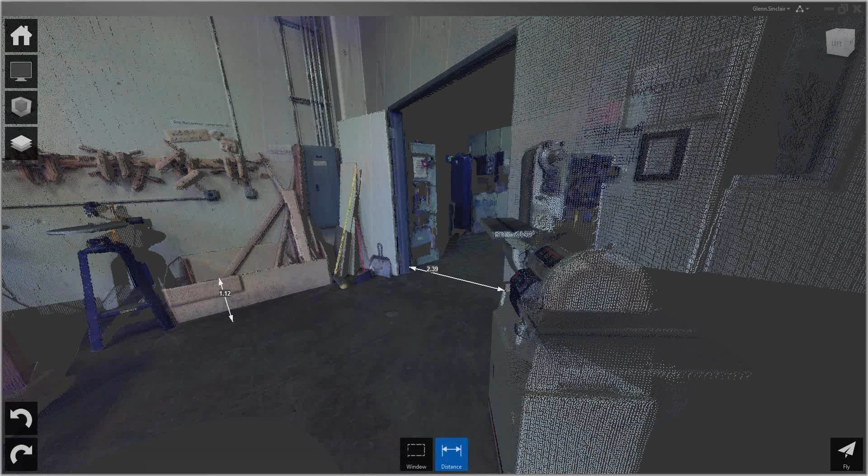So the last two little bits I wanted to talk about, that are in the Building Design Suite that you may not be using, are 3ds Max and Navisworks. These are both in just the Premium and Ultimate suites. For 3D Studio Max, again, they make it as easy as they can to get through from Revit into 3D Max - they've got the Suite workflow button there, so it doesn't get much easier to transfer your Revit model over into 3D Max.

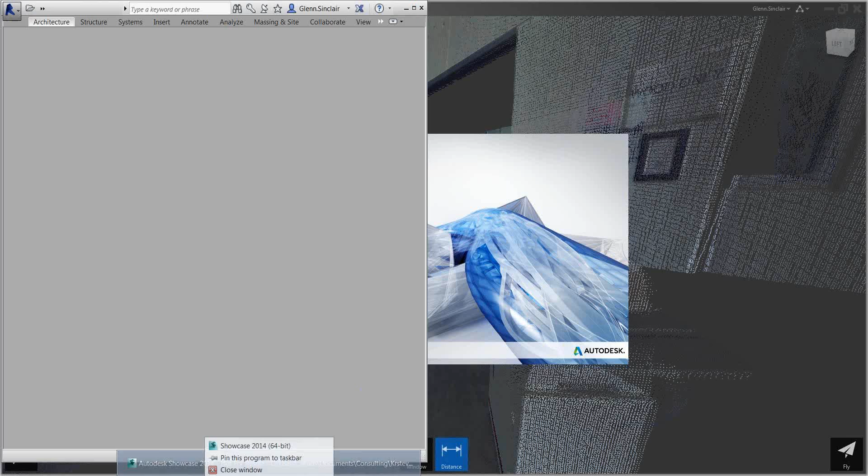One of the great new tools they've brought on board - excuse me, I'm just going to close that showcase down there in the background. One of the new things they've done is a shared material library, shared between Revit and 3D Max, which applies when you use the Autodesk materials inside of Revit.

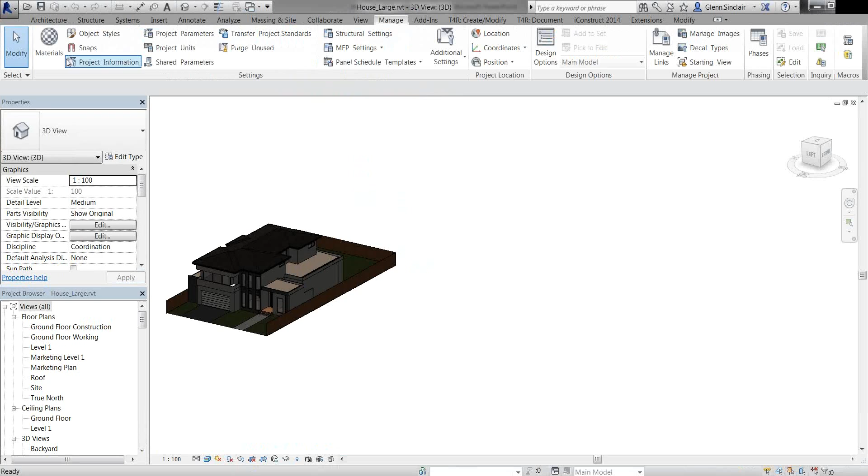When we use Revit, we have an option for a number of different materials. In the lower half of those material options are the Autodesk materials. So if I say manage, I come to the materials editor. In the lower area of the materials editor I have the Autodesk materials, this option here.

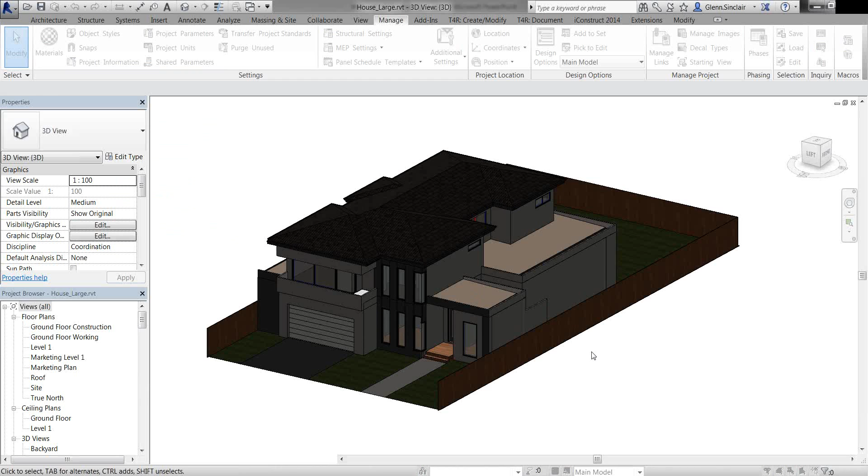These are shared materials between 3ds Max and Revit, so when I transfer this model over into 3ds Max, it comes through with those materials. If I say transfer to 3ds Max to do an exterior rendering, I've got the one-click workflow from Revit into a brand new Max scene. It does take a little while to get transferred over, but it's really great for getting this model through into 3ds Max.

It does come through with the information from the Revit file, so it comes through with the current camera view. This particular view that I'm looking at in the model is the view that's transferred. So if I have objects hidden in this view, they will not be transferred, and if I have a design option set in this view, that's what will be transferred over into 3ds Max.

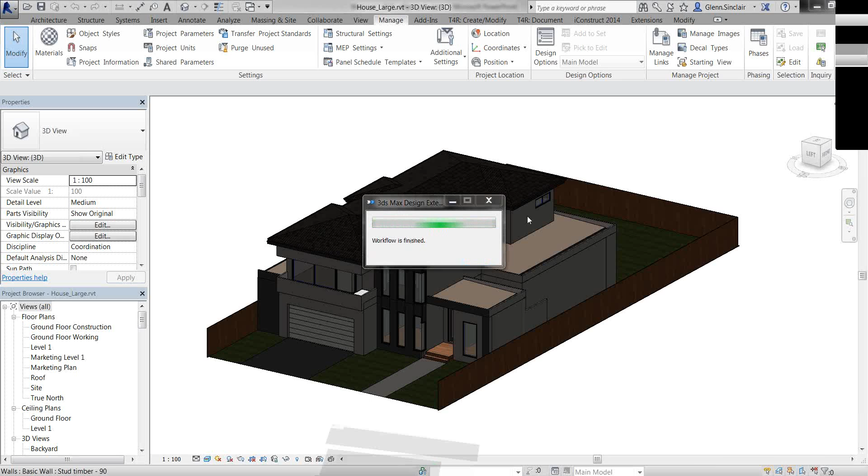So it's come up here in 3ds Max. It's also brought through the sun settings, solar settings, positional settings from my Revit model. I had that set up at whatever I had, and it's brought that info through from Revit over into 3ds Max, so that's great that it presets that for me. As I mentioned, it does bring the materials through.

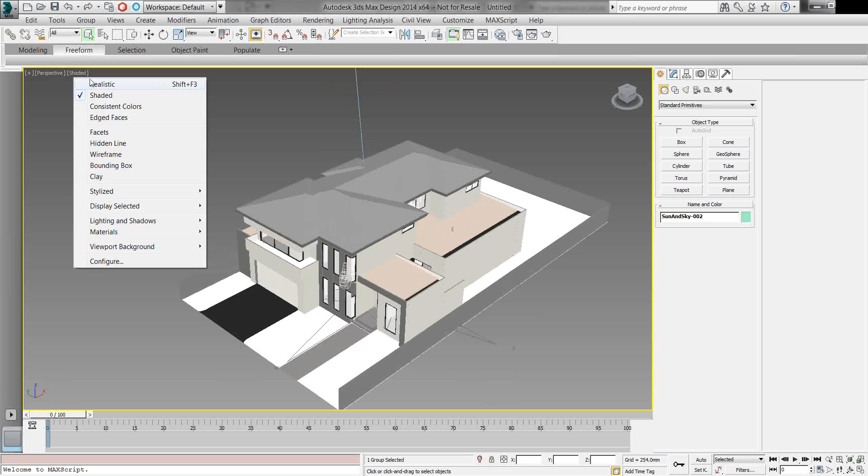If I put this view on Realistic to show materials, you can see that any Autodesk materials I have used in the model will have been brought through into 3ds Max. I've got a few things open here so that's starting to slow down a little. There's my tile pattern, and my timber pattern as well.

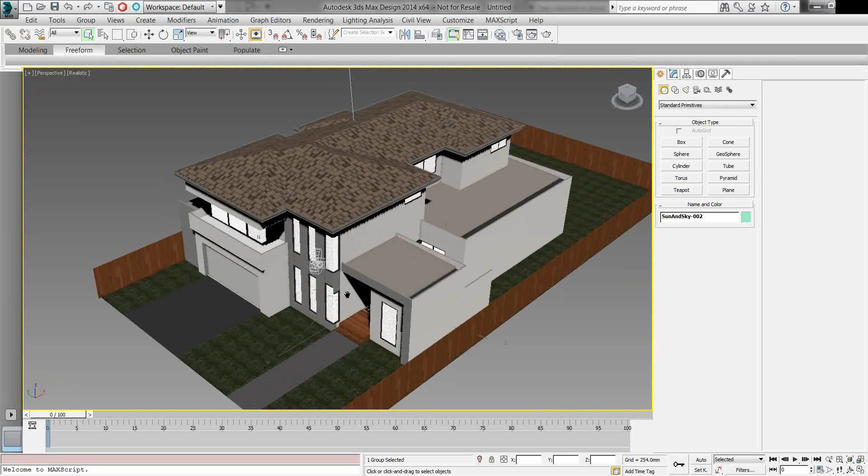So Autodesk materials, one-click workflow through. I'll set my view, or set up that same view, whatever it was called. Let me set a new view then, and just hit the render button here in Max, and you can get a reasonably good output straight from Revit there.

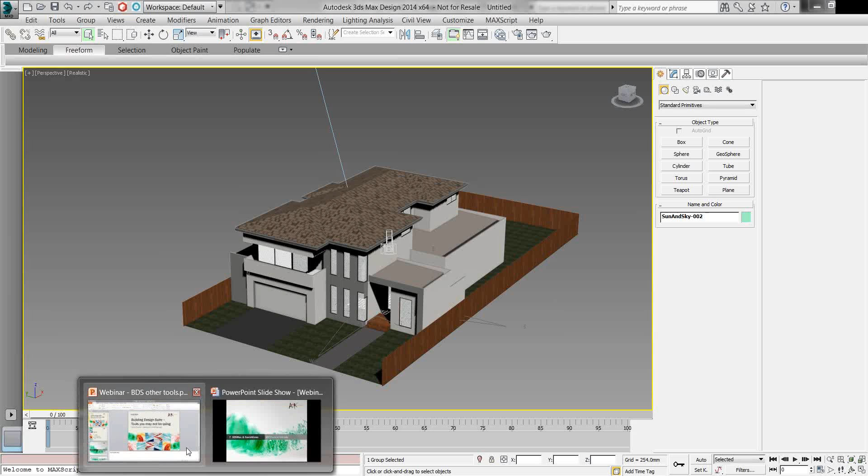And the last of the tools that you may not be using was Navisworks. Again, in the Premium and Ultimate Suite, Navisworks is a really powerful tool. In the Premium Suite we get Navisworks Simulate, and in the Ultimate Suite we get Navisworks Manage.

The main difference between the two is that Navisworks Simulate within the Premium Suite doesn't come with the clash detective feature, which is for the full clash detection. But even Navisworks Simulate can be used to bring models together, to aggregate models from various platforms.

If we've got IFC files from structural people, or files from anyone using other software such as AutoCAD, we can bring all of those models together in a really lightweight format inside of Navisworks. That converts the 3D geometry to a really lightweight format, which makes it easy to explore.

The other thing, if you've got Navisworks sitting there and you're not using it, is it can be used as a communication tool during the design process, but also once you get to site. There's the Navisworks Freedom Viewer, which is available, so you're able to combine a number of 3D models together into one 3D model.